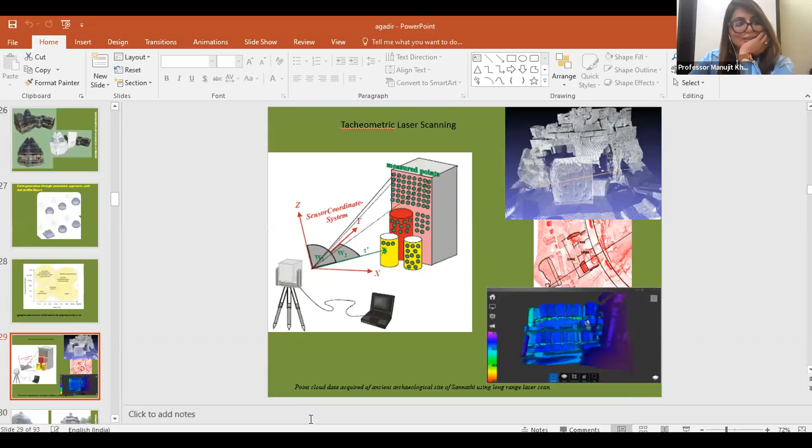Am I audible? My screen is visible? Yes, sir. Please, if there is any lag or something, do let me know. Sure, sir. So you're still on slide 2. On slide 2, oh my goodness, you should have told me. I'm about to reach 29. Now it is moving, sir. When I put it in the slideshow, it was not. Escape full screen, sir. Okay, now is it visible? Is it moving? You have to share the screen again, sir. Okay. Yeah, it is visible now, sir. I think all the while I was talking, none of you were really looking at it. So I might just go back quickly. Slide 3 has come? Yes, sir. Slide 3. Okay. I must have really sounded like without any.

Now can you see it? Now I changed the slides. Can you see it? Yes, sir, it's moving. So when I put it in the slideshow, it is not moving, I suppose. Yeah, this generally happens, sir. Okay. I'm sorry for it. Please do let me know. I'm on slide 4? Okay.

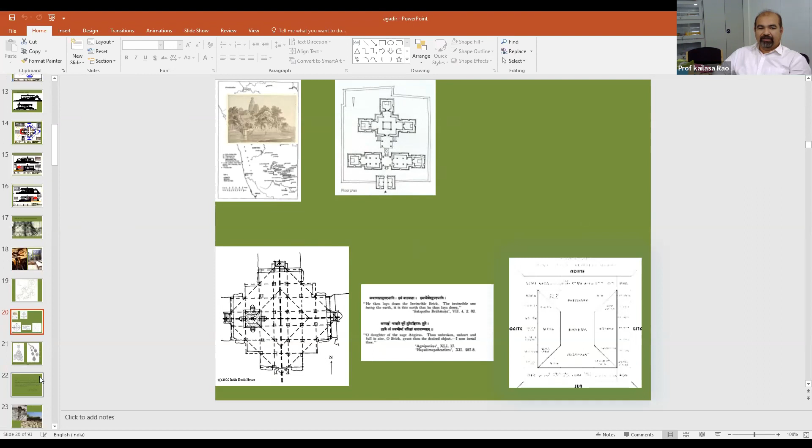But when it comes to publications, you can see either an oversimplified approach like this, or very age-old drawings, or very cryptic things like mandala types. But in reality, of course, I was also talking about Professor Adam's work in terms of the configuration of temple architecture, its deviations and its components; that much is done. But what happens is about this level of work.

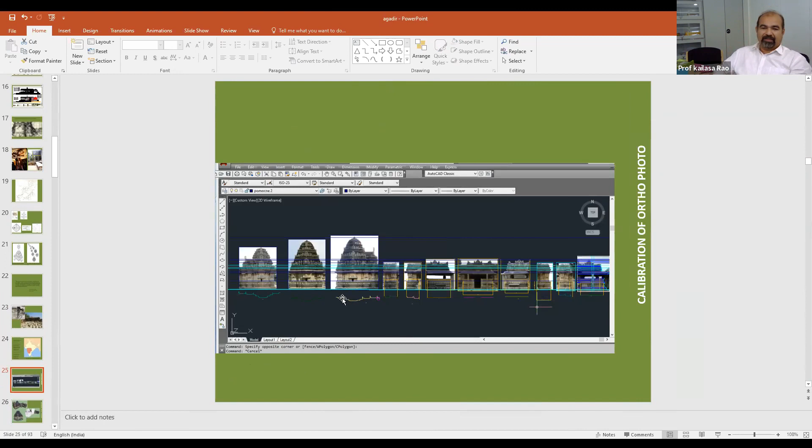Now, conceptualization itself is very important. For example, these are the initial techniques of documentation. We were trying to do it other than manually, maybe rectified photography, but it doesn't really work. If you really look at it, by just adding all four side elevations, you cannot make a building. This is a classic example. So there must have been a different approach altogether. This must be a generative logic. Now the slides are moving.

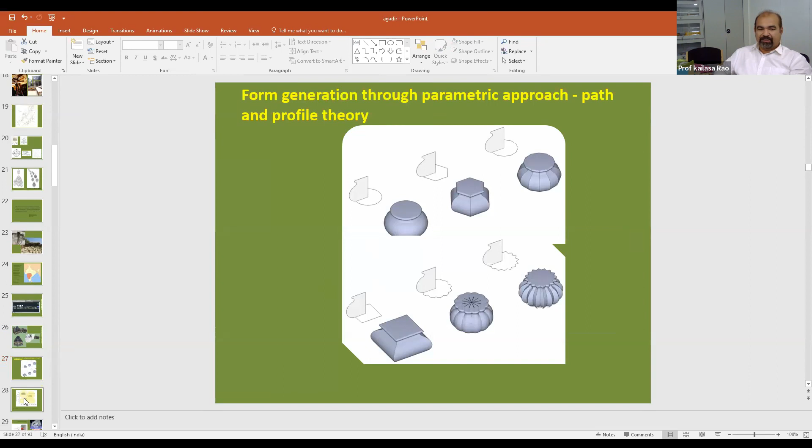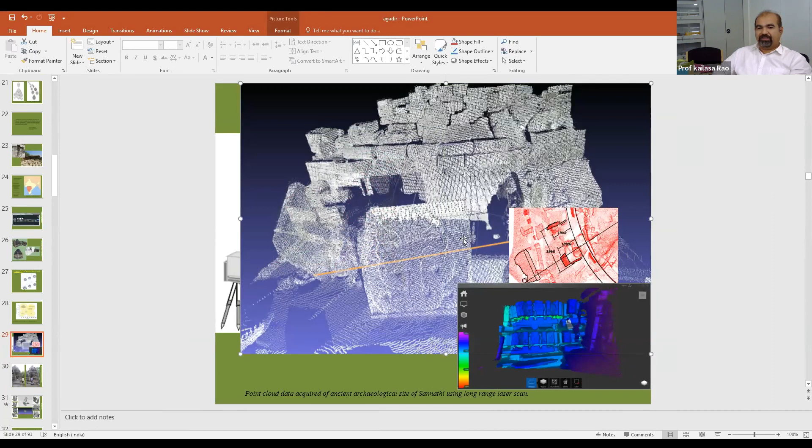Basically, it produces this kind of point cloud data. With this point cloud data, you can measure distances from point to point, and it's much more comprehensive. That was very expensive, so we started using something like an Xbox kind of thing. Of course, it works only in cloudy conditions or at night. Daytime is very difficult because it's very sensitive to heat.

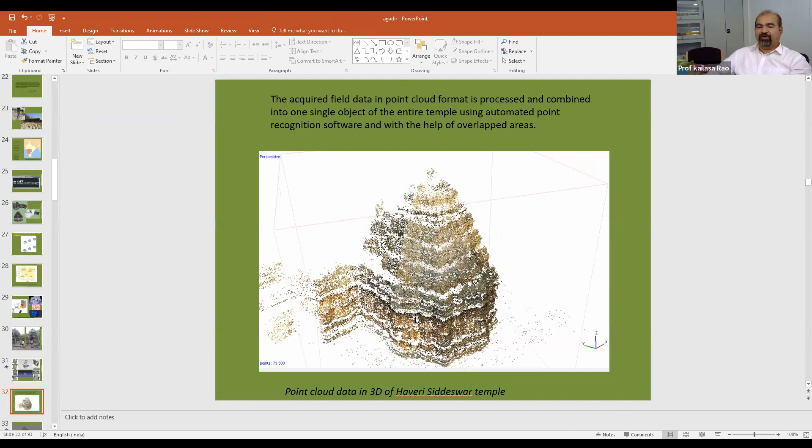With that, we could realize that you are not looking at a 2-dimensional approach, but getting the complete 3-dimensional idea of the whole thing. There was a limitation: we could only scan some 3 meters by 3 meters, so we used to assemble the whole thing into a larger one. The data acquired was points, collected, let's say, every 1 mm, and then you start processing the data using photogrammetric techniques, laser scanning or tacheometric techniques.

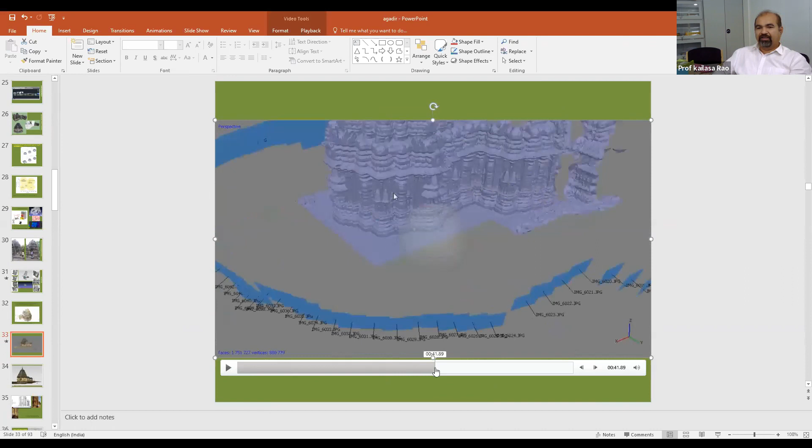So this is the point cloud data that we have. Then you process it into slightly denser data. You can see that almost 1 crore 12 lakh points of XYZ coordinates have been collected, and then you convert it into a mesh using different software, and then you overlay the imagery over it. So these are the kinds of techniques that we started using.

With this, we could get a more detailed understanding: you are not looking at a building just as a plan, elevation or section. You are acquiring the entire 3-dimensional information, because we realized that such buildings cannot be understood just using plans, elevations or sections. It has to be in totality. Got my point? Because the plan here is different, and the plan at a higher level is totally different, isn't it?

It cannot be understood like a plan, elevation or section. Plan, elevation and sections are modern tools of conveying your idea to the construction site, but can you conceive an idea through them? That is a question that we have. If you look at it, at every level the sections are different. At different levels, it is quite different from the other side of it. So all these kinds of things have to be really looked into.

So of course, we also have to be very critical about technology. Everything that can be done with technology always has to be cross-checked. Whatever I acquired always has to be cross-checked. And sometimes, to cross-check whether what you have seen on screen and what you are getting as an end product are the same or not, we used to even 3D print and check it. It is not only a make-believe thing. So that is the kind of details that we got into.

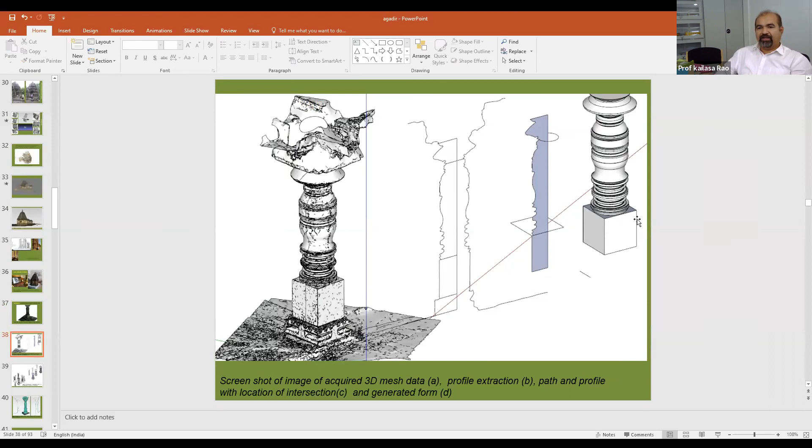Now, I was trying to understand how they were conceived. Perhaps one way of looking at it is through profile approaches. They don't do the entire drawing, elevation and everything. Just cut a profile, rotate it, and you get it. Or maybe you take different paths, like a circle or some other path. So this is what I acquired using scan data, and I deduced the data and tried to see whether it matches.

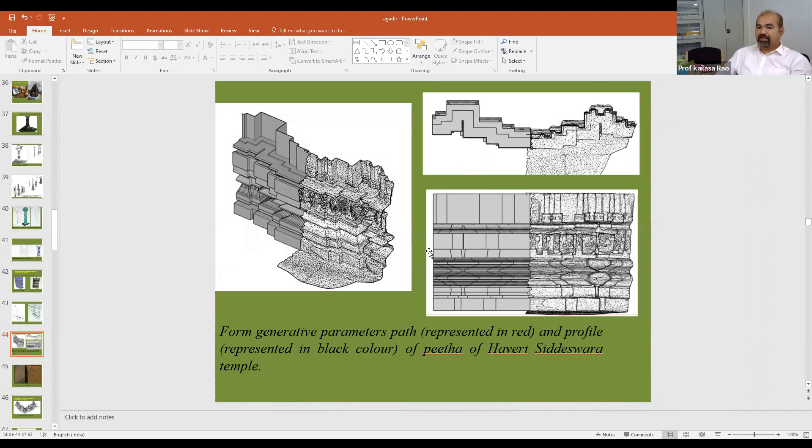It was perfectly matching, in the sense that for any complex detail like this, you keep changing the paths and profiles, and you can achieve very complicated details, whether at an element level or at a building level. For example, at just a component of the facade, every course is so varied. I could see that it is part of the profile, which in normal methods I couldn't have understood. But can I recreate it using simple algorithms? Yes, it is possible. And I saw the same approach in the floor drawings of many such temples.

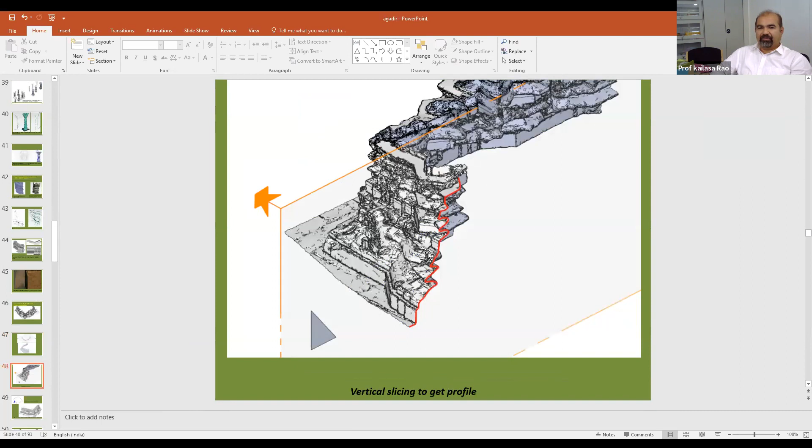To put this theory to testing, we took different components, like the plinth of a particular temple. Look at this particular temple, the Kashi Vishwanath temple, at a place called Lakkundi in Karnataka. The upper level plan is different, and at the lower level the courses are quite different, and they seamlessly join. This is the scan data. I took that scan data and started cutting different profiles, and finally I could reduce the whole data into these two profiles.

And when I revolved this in the software, exactly the same thing happened. I have not changed anything. It's not like I do the lower base first, then this base, and every course. It's just a generative approach. It worked very well. And to see whether what they have done and what I have done match, I matched both the meshes.

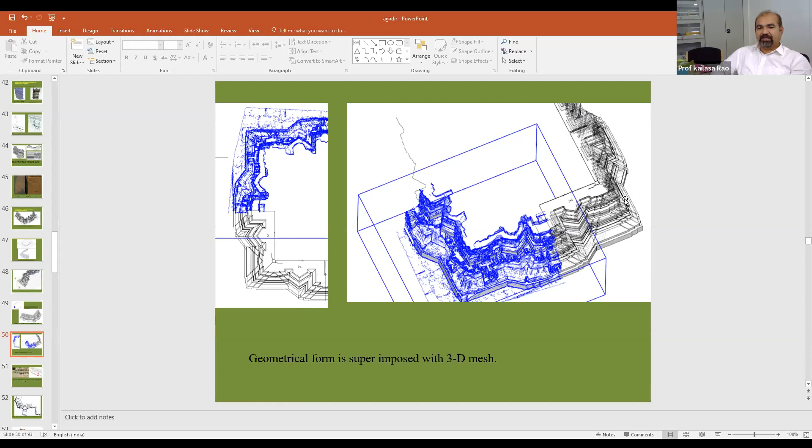What you see in blue is the scan-acquired data of work done in the 11th century, and what you see in the lower level is data generated using a computer. Every line matches, including the small grooves. The little corner tips all fit so well. That means these guys had a method of computing. To test the theory at a larger scale, I took the overall building of a temple at Haveri, reduced the data into smaller parts, and started working in basic software. It perfectly looks like they used a certain kind of computing.

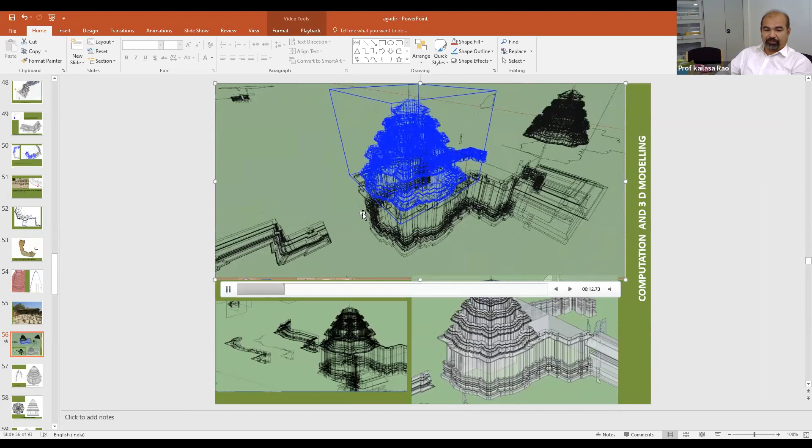Now, do not confuse computing with computers. Computing is an approach. You don't draw, you generate it. It is not that you draw a plan and work out an elevation. It's not drawing based, it is a generative approach. So theoretically, it seems to be matching in my computer, but I have to test whether the theory holds or not. So how do I do it?

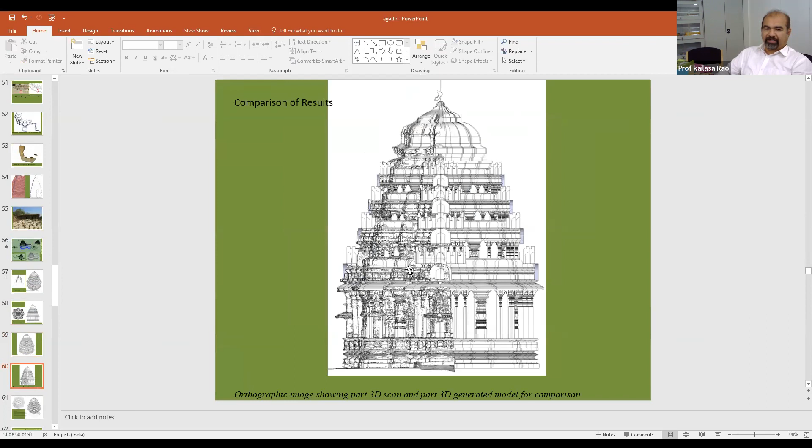I scan a building and generate a building using a certain method, a profile approach, and then match both the meshes. You can see that, of course, a little erosion and distortions are there because of the vagaries of nature, but otherwise every line really matches. So I tested the theory for even star-shaped temples also, a temple called Doddabasappa temple.

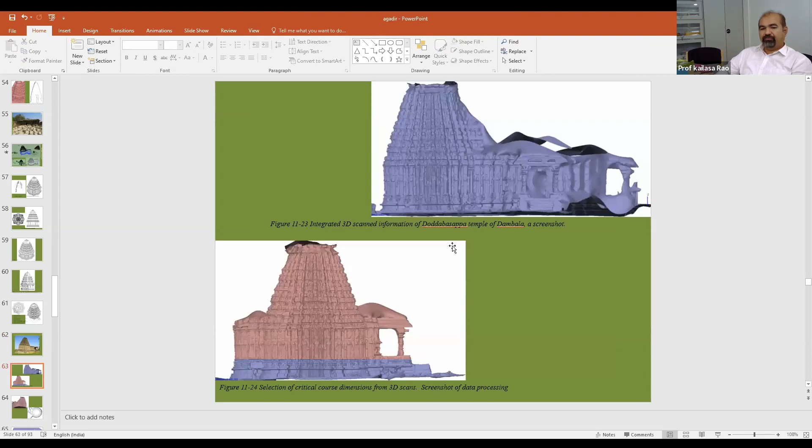So using whatever tachometric techniques available, we tried it out, and different layers of every course have been more checked under the scan data. This is the scan data sliced at a generative level, and then we understood the various logical configurations of it, how much of the reduction factors and how it can be done.

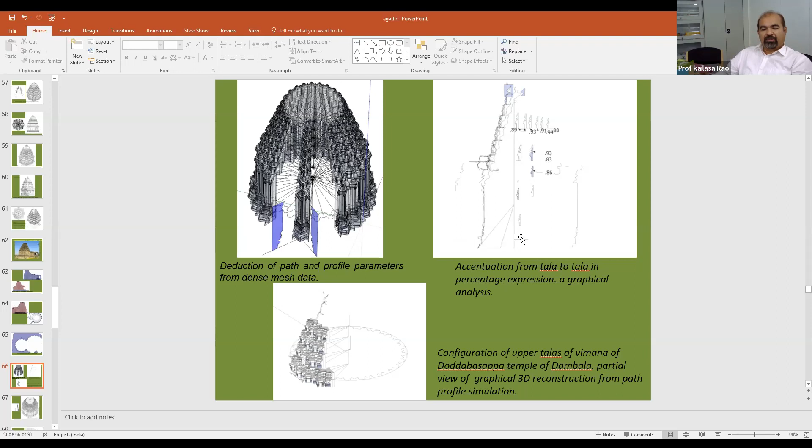So we tried it out, and it really, interestingly worked. I could generate the whole structure without actually drawing it, with pinpoint accuracy of every line. That means our traditional knowledge systems had lots of these kinds of approaches where you can create, conceive, and translate such complex geometries without the current day kind of drawings. If you really had to make working drawings for it, it may cross 5,000 or 6,000 drawings. But how could these Sthapatis do it so effortlessly? So for each of these things, there seems to have been a strategy for conveying these ideas.

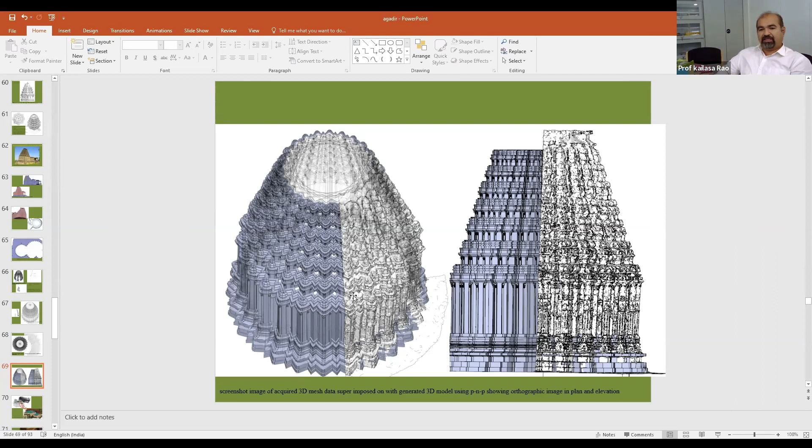So that's the thing, and it can be broken into every course level of detail. One course, when it's done, automatically generates the second level course, the particular next seam line. So I have tried this out with various other things with Professor Adam Hardy, around 8-9 years back.

Some of the things, like drone-based approaches, we could also do it, because at ground level it was very difficult to assess the roof plans of these temples, impossible to actually draw a roof plan. But with this kind of approach, using point cloud data that I showed you, and how we processed it, we could generate it. Now it's giving a lot of new ideas, that they have actually a generative logic for it. So we could really reconstruct a variety of these kinds of structures using these technologies.

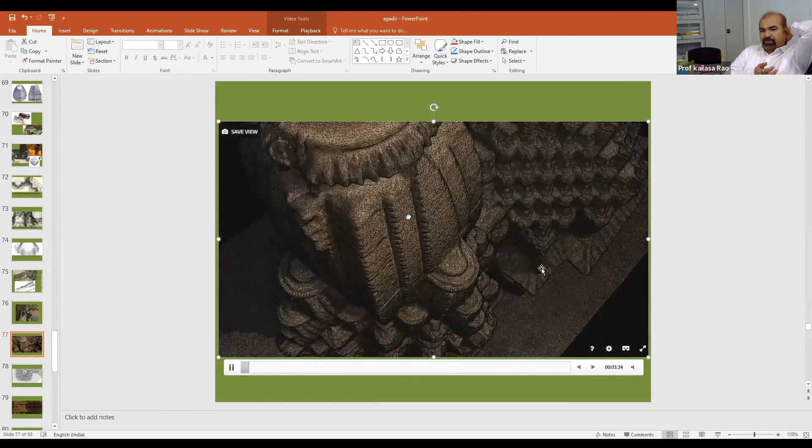Another temple, Jasmalnath temple in Asoda, Gujarat, one of the Solanki period temples of the 10th-11th century. Perhaps a lot has been learned by the Khajuraho group of temples from these kinds of temples, multi-Shekari temples, which are called Anekandaka kind of temples. So we could really understand the various facets of it.

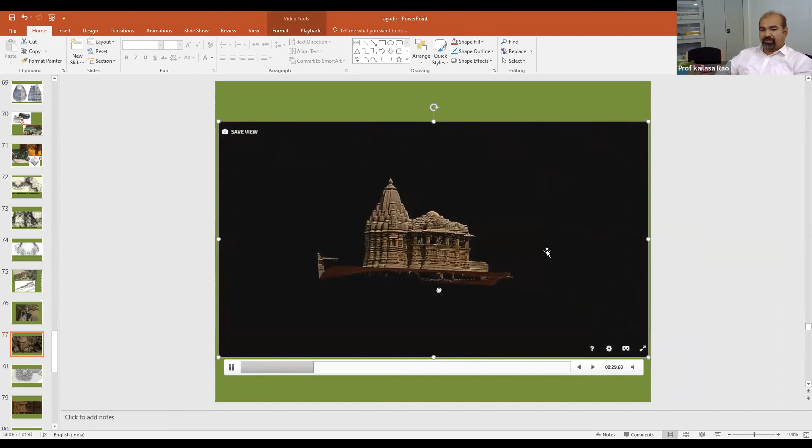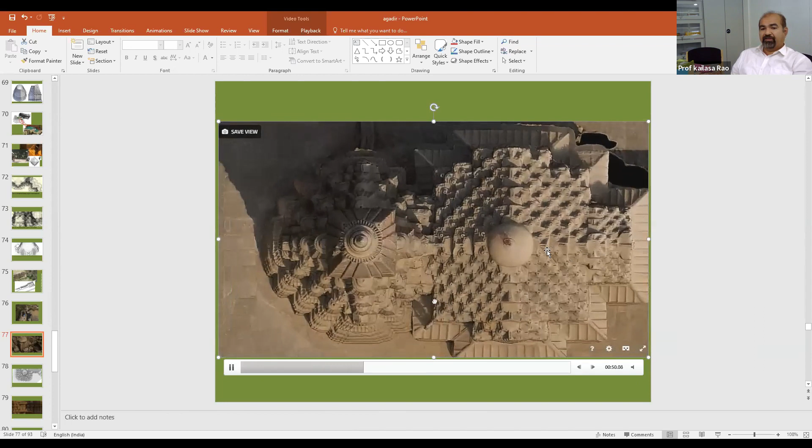Now, once I do it, I put it into orthographic mode, not perspective mode. Lots of original ideas, what they might have done, started appearing to us, the most important aspect being actually conceiving a building from top to bottom. This is my opinion, that they always conceived from top to bottom. So this is the kind of roof plan which otherwise would have been impossible for us to generate.

They look similar, but there are a lot of variations. They have tried it out from one configuration to another configuration. A lot of this kind of proliferation of forms has been done.

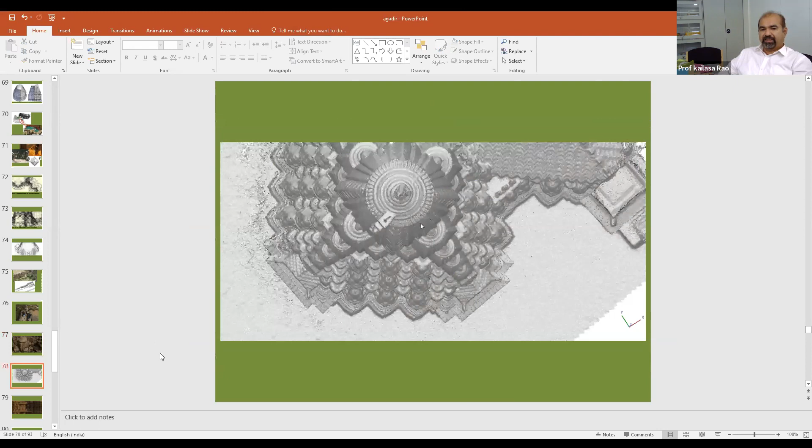So what I'm trying to convey is that these kinds of ideas, which they generated thousands of years back, at least 1,000 years back—most of them are 9th, 10th century—we'll look at another temple called Taranga Temple in Gujarat.

Which we could use with this kind of data that we may acquire. It was completely a revelation, the level of complexity that they have done it, just using a simple logic and taking it forward in a very complicated way. So this is the kind of scan data I'm showing you. The moment you take it into a computational understanding level, things can be very, very interesting, and new understanding is emerging about how they developed such complex models using this approach.

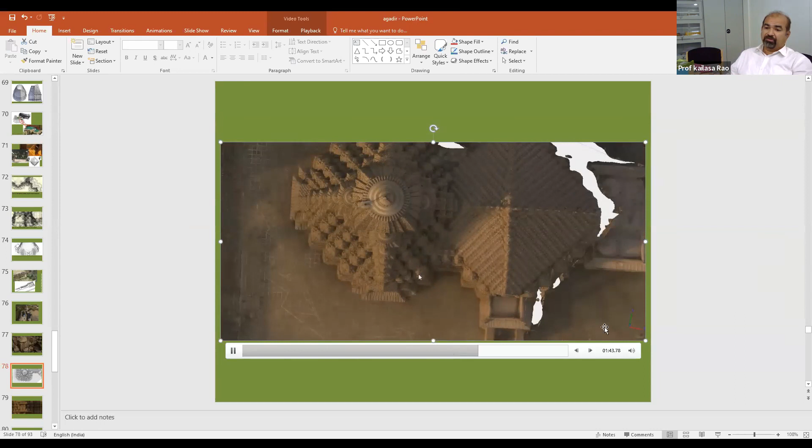So after doing this, I also started using it extensively in different areas. One of them is the ghats of Varanasi. I did around 5.5 kilometers of the running length of the Varanasi ghats.

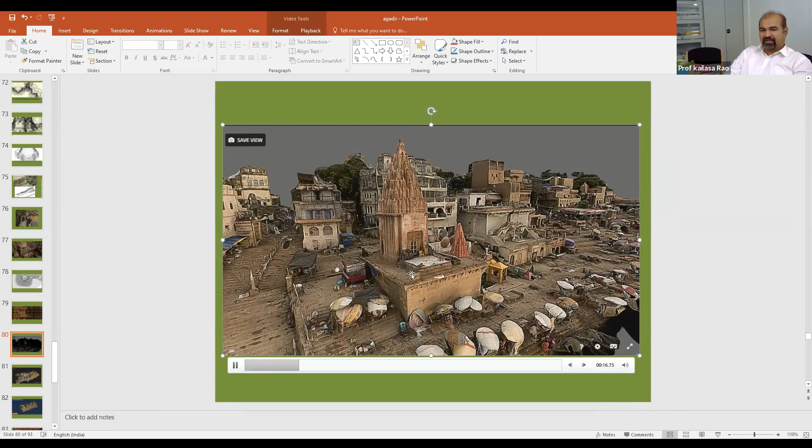That is for a different purpose, not exactly to understand logic of construction, but more for assessing the complex nature of these ghats, identifying different layers, so that it can be restored and managed, given the complexity of thousands and lakhs of people gathering there.

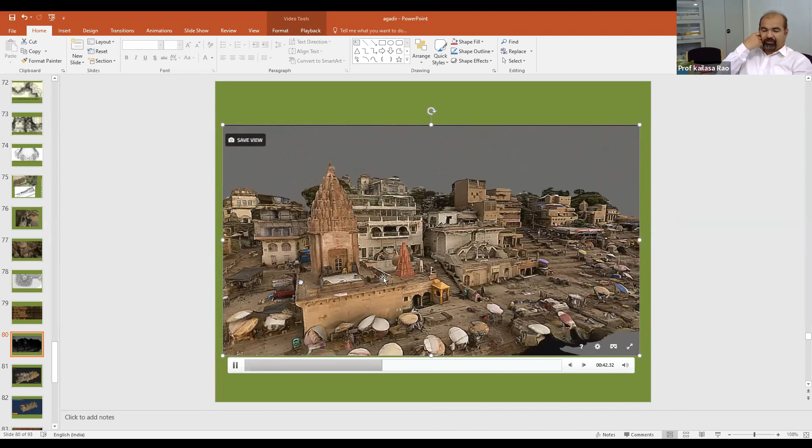So to assess it, you need a very detailed level of studies. Once you have a detailed understanding, only then can your interventions be good.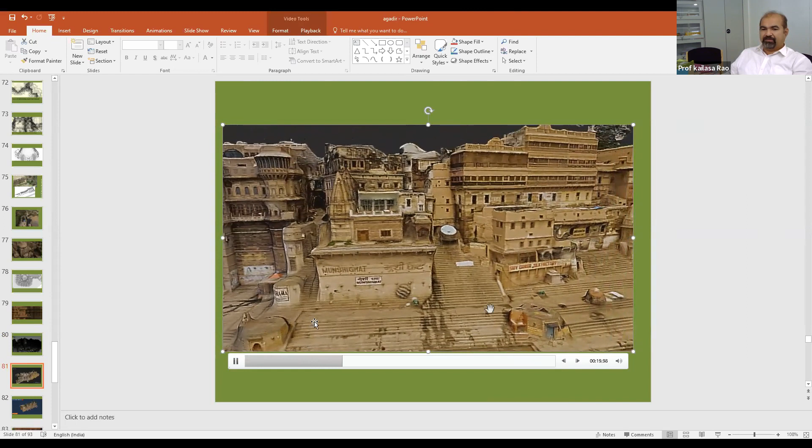Now we started a program at SPA Bhopal introducing various new techniques and strategies to understand heritage with a techno-based approach. One part of it is understanding the computational logic, and the other is using these tools as strong diagnostic tools for detailed assessment of buildings, monuments, large areas, urban fabrics, and other things. These are the areas I've been working on.

And of course, these are all integrated with new georeferencing, whether matching at every level or even in terms of assessment of every little point of it. So quantification and various things we can do very realistically.

Lastly, I can show what is really happening with these kinds of complex structures on ground. Imagine this 11th century work, and overall this is the kind of restoration somebody has done.

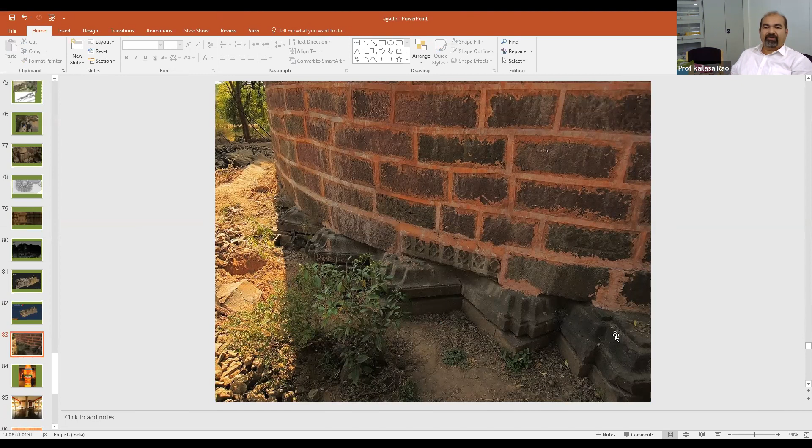No respect for the original understanding of it. We somewhere lost this whole idea, thickly painting, hiding all the details, destroying this one. There's a lot of renovation that happens unsympathetically without caring about the original idea, such complex wonderful ideas, and just using some bathroom tiles or granite cladding, or insensitive additions without even knowing the original geometry.

This is very unfortunate. I can only say these are insensitive ideas, a lack of understanding, because they never understood. We have not understood our own genre of temples, the various complexities involved, and eventually make such a mockery of it.

So in a nutshell, what I was trying to give you is an understanding of Indian traditional architecture, just one small example of Indian temples, and try to explain the various complex geometries it has, and how to really look into it using a computational understanding.

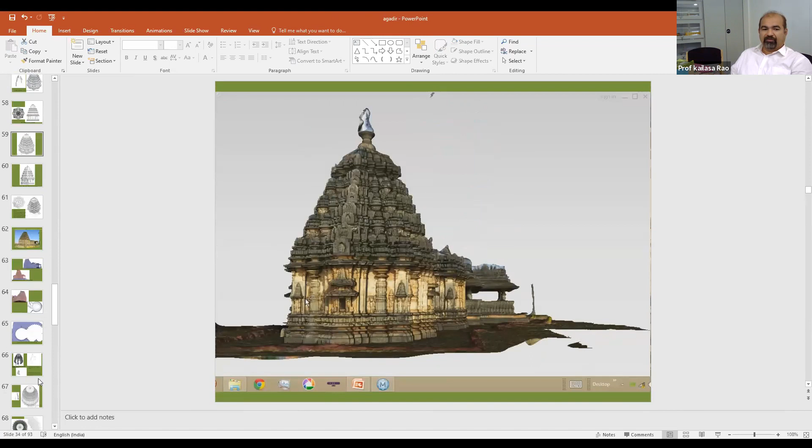And all this data is not just for understanding purposes, but once you have this data, you can do a lot more detailed assessment of its condition, very accurately. Once you have strong orthomosaic information, you can create quite interesting levels of data which we can take forward for various other applications.

Hope I could make some introduction to various approaches of looking at these traditional buildings with a few examples that I could take.

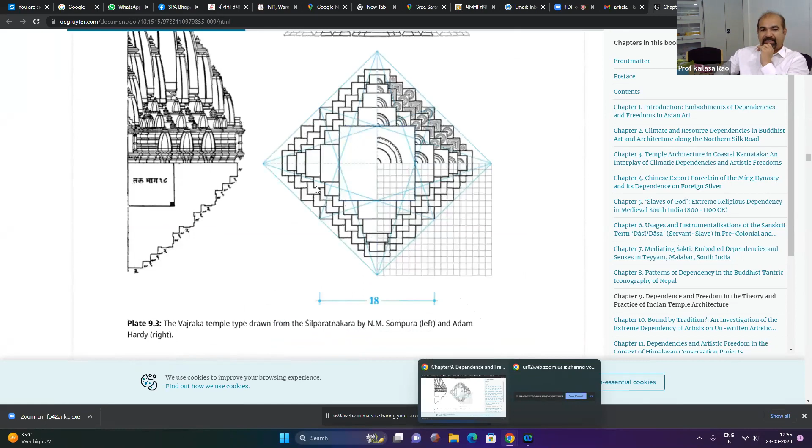Now this is what I have given him in terms of elevation. Exactly based on this, he can really, now this is text based. Let me just show that one.

Yeah, these are the text-based ones, and to cross check whether the text was really followed and how much, this was my photogrammetric analysis area - what really happened in reality on ground. Can you see this now?

Yes. So now how much subdivision happens in plan, how much happens in the vertical, what really happened. Many times we see this - for one Bhumija temple, this is before I evaluated this temple.

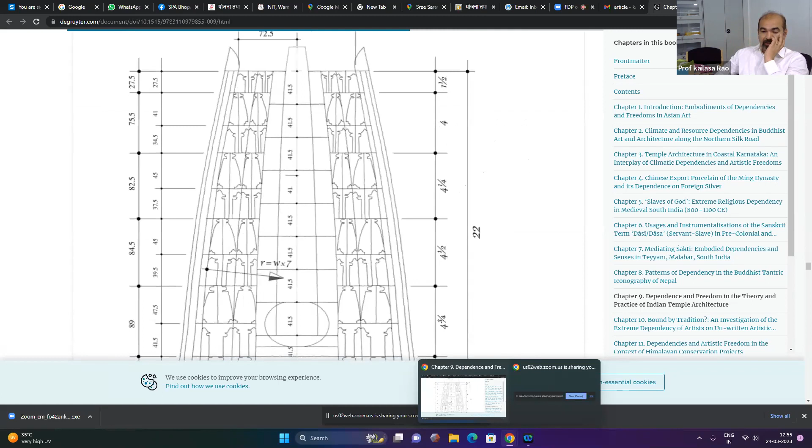This is what Professor Adam Hardy has seen, and he has done the entire Bhumija configurations text based. But in reality, when they tried to measure it, it was not matching, or a lot of anomalies were there. So these are the text based ones. And after this, if you can see this, this is the scan that I did. In fact, sir has been very kind to give my acknowledgement in the paper that these are the photogrammetric models developed by Kailasa Rao.

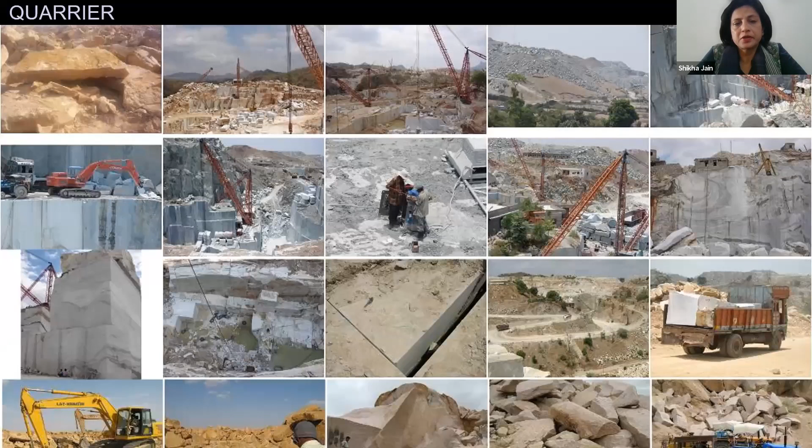We went into several quarries. I'm going to actually switch off my

So as part of the project, we interviewed quarriers, processors and suppliers, as well as craftspeople, architects and conservationists. There were about 150 craftspeople that we could interview. And we mapped these clusters across the entire Rajasthan, in total 9 clusters. The types of stones vary, and the craftspeople have their expertise in different kinds of stones. All this data was documented and recorded.

You can see here the process that was recorded and the products. So clearly this craftsmanship is something very unique to India and Rajasthan that needs to be propagated more. But if we look at our current architectural education, most of the time the students are not informed about the details or the process involved in this.

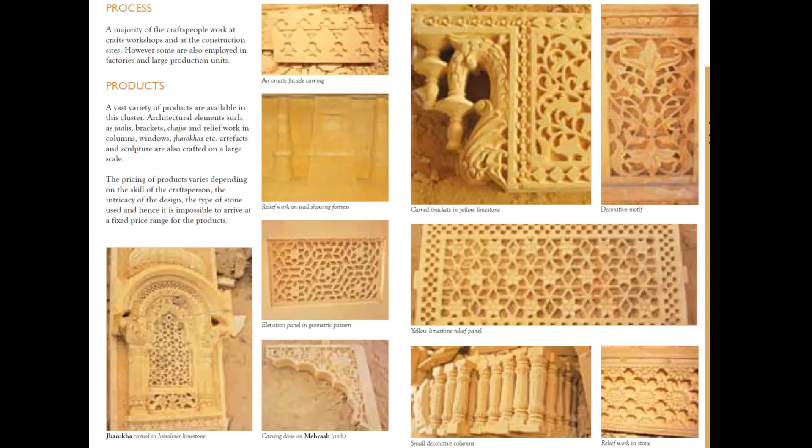For this project, we had about 5 groups where we involved architectural students and interns who went to the field and interviewed these craftspeople. Our question was, how can we learn about stone crafts and knowledge systems? One is understanding details from the historic architecture in stone, and second is learning from the master craftsperson.

From the archival resources, we could understand that the stone used in historic architecture is even mentioned in our traditional texts. They describe the bonding done with different kinds of stone, and name the male, female, and neutral stone. And of course, examples of stone use are there in historic architecture since ages, right from rock art to temples, as you just heard from Professor Kailasa Rao, and later on in forts and even houses.

And this is very well recorded in traditional texts, including paintings like you see here from the Baburnama, where he's supervising construction of a garden, or the construction of Agra Fort in the Akbarnama.

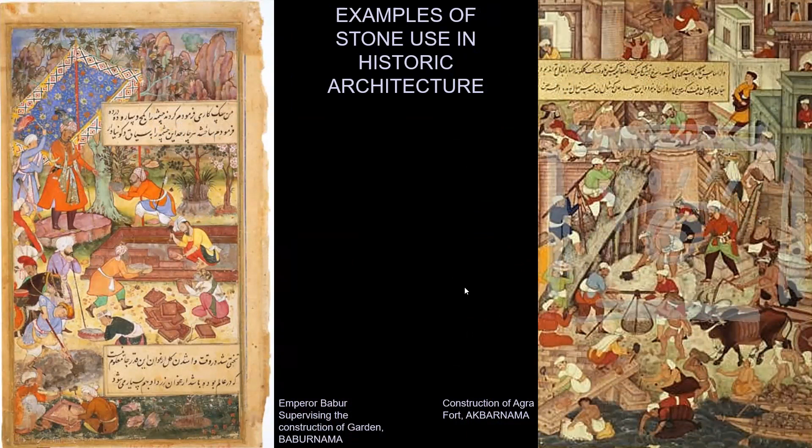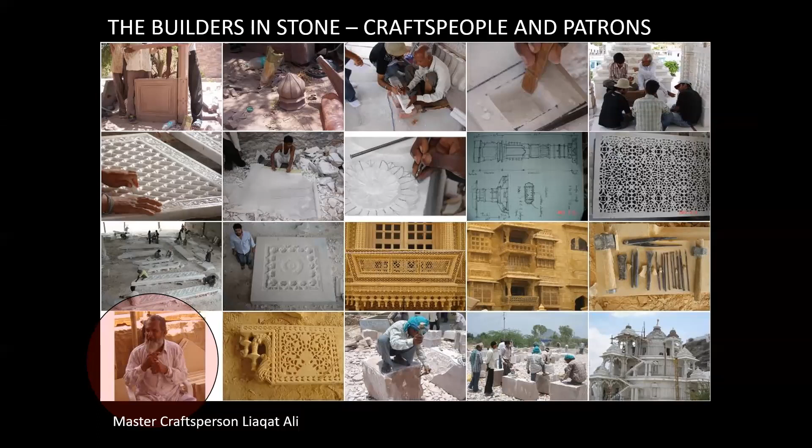Who are the stone craftspersons today? The temple builder, sculptor, stone carver, inlayer, stone mason, stone polisher, quarry workers. So you see the Sutradhar, Stapati, it could be the Sompura community, which is residing in Gujarat currently, but they are the ones making temples even today, largely in northern and western India. And then you have the Stapati community that is working in southern India, in the Tamil Nadu area and Karnataka.

You have the sculptor or shilpkar. So these are specialized expertise. Most shilpkars specialize in the making of the idol of a particular deity, deriving designs from years of training and intuition. They often select the stone for the idols at the quarry. They calculate the proportions required for the deity and undertake its carving and finishing.

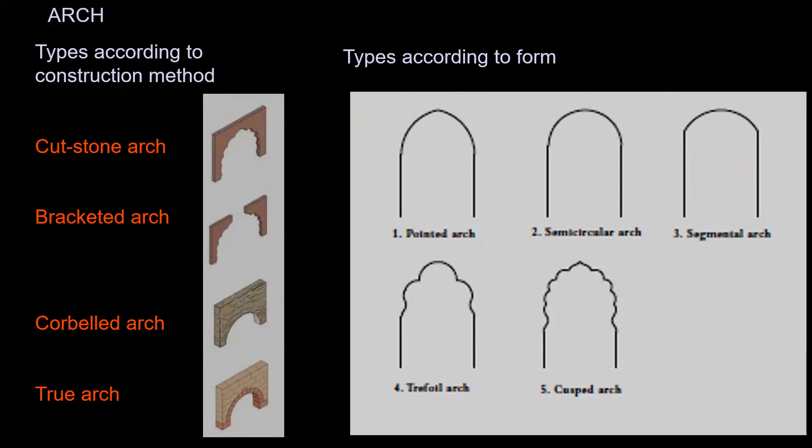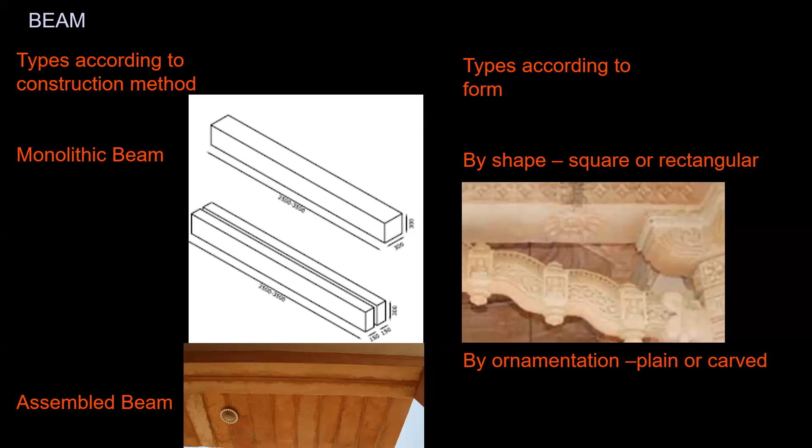Similarly, beams, how many kinds of beams are there? The monolithic, assembled, square or rectangular, plain or carved. What are the fixing techniques for these beams? Brackets, which are one of the most diverse in terms of design and variation. We find them in various historic structures.

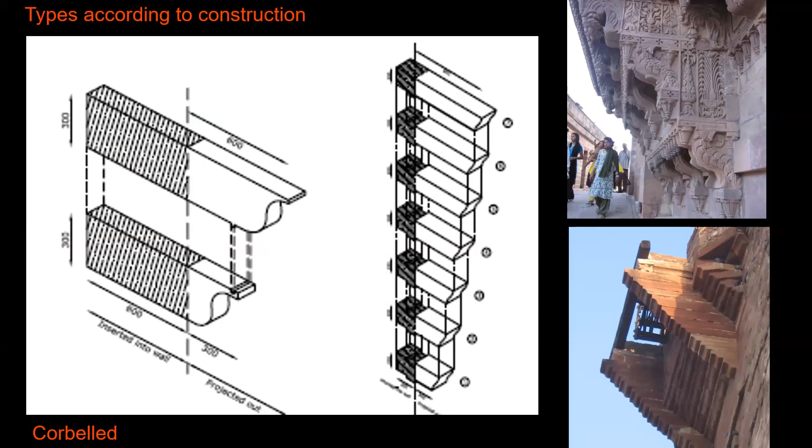And this was created as a model by the late Mr. Nimish Patel, who was also advising us on this documentation. So various types according to construction, you can see the variation in brackets. It could be single or several layers, extensively carved.

The fixing details. So you can see how much the bracket goes inside if it's supporting a chhajja, or how much it goes inside if it's supporting a complete balcony. The usual rule is that the plain bracket should go in as much as the carved one you see outside, as a principle of cantilever. So these are some variations. So again, from the traditional carving to the current ones, what kind of designs are available in brackets?

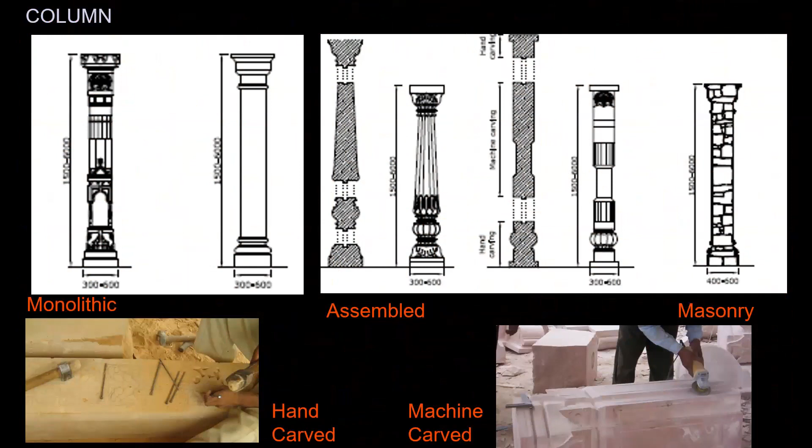Similarly, columns: monolithic, assembled, hand carved, machine carved, and how this fits in, the base, the capital, the jointing, the carving details, and how these are used in various ways. The roof form, which is very complex because you have both the flat and the domed one.

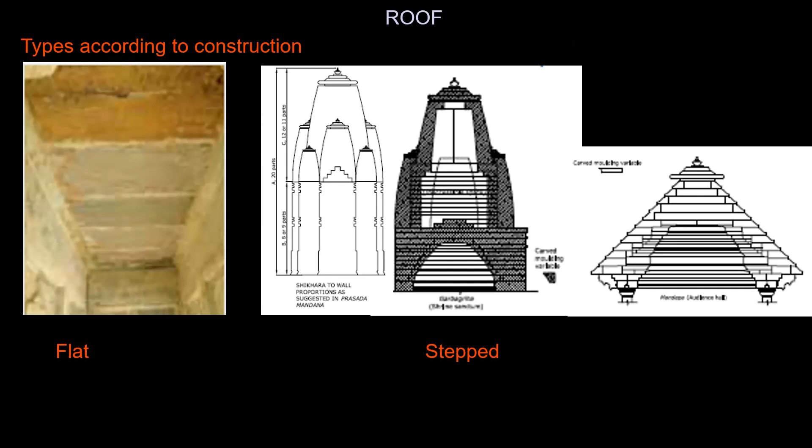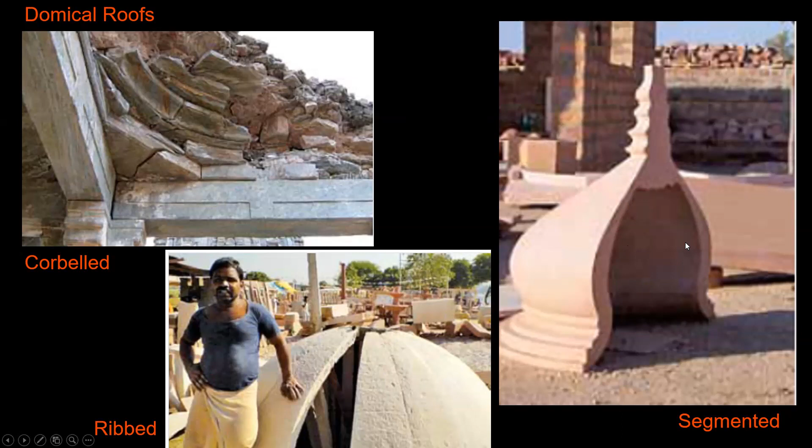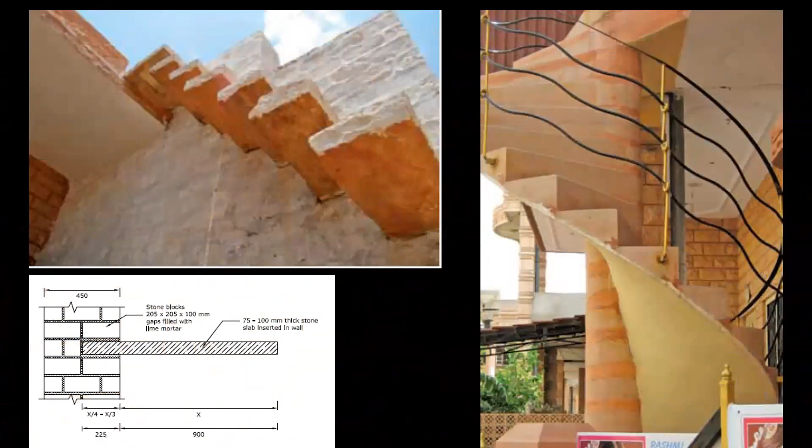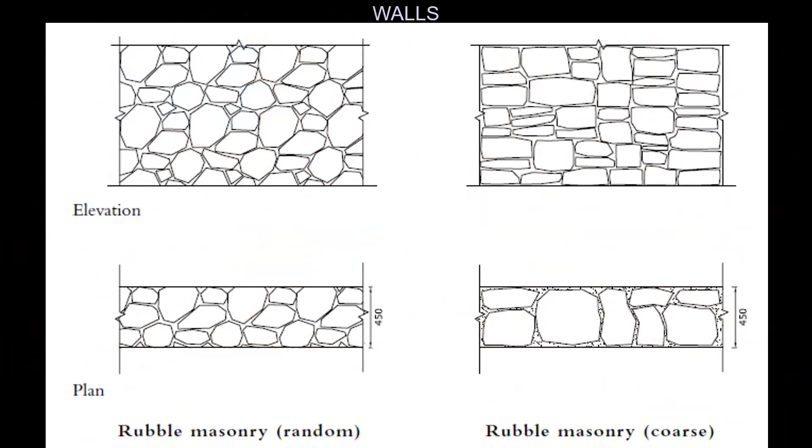So the walls, of course, again, the rubble masonry coarse, there are various forms, how they do infill, and how this kind of construction continues to happen even today, especially in places like Jodhpur, Jaipur, in fact, all across Rajasthan, because the craftsmanship is still available there.

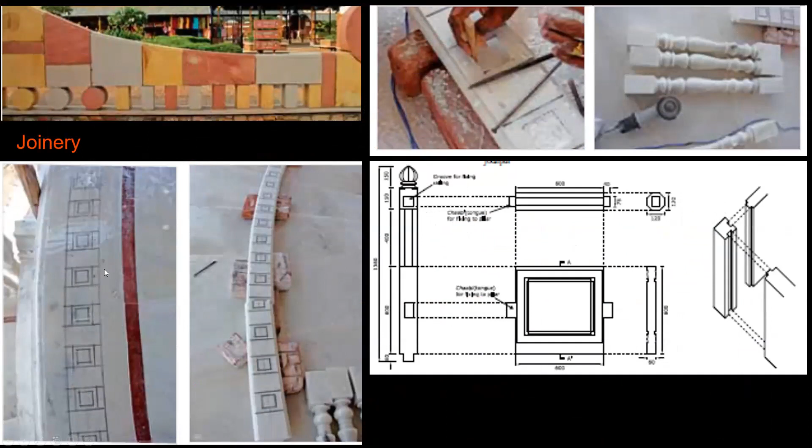So again, we have a craftsperson who's marking it, who's making holes, and how the railing is fitting in the details. So this drawing shows how the stone railing and the top rails would fit into the pillar. And you can see the beauty of the stone railing. So on the left, of course, you have the traditional ones. On the right side, you see this from the Gandhi Museum, which is in Delhi. You can see the innovation in stone railing below, which is very contemporary, but still an interesting use of stone craftsmanship.

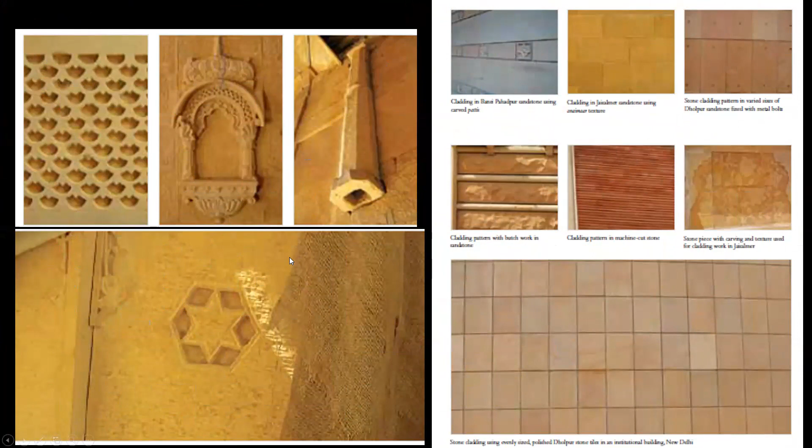But of course, the traditional finishes, you just have different kinds of hand finishes, which have been recorded and documented as part of the indigenous knowledge. And the current finishes, of course, the kind of finishes that you get through the processors and suppliers today. But the whole idea of this was to promote the craftsmanship and to link this knowledge with the contemporary practice.

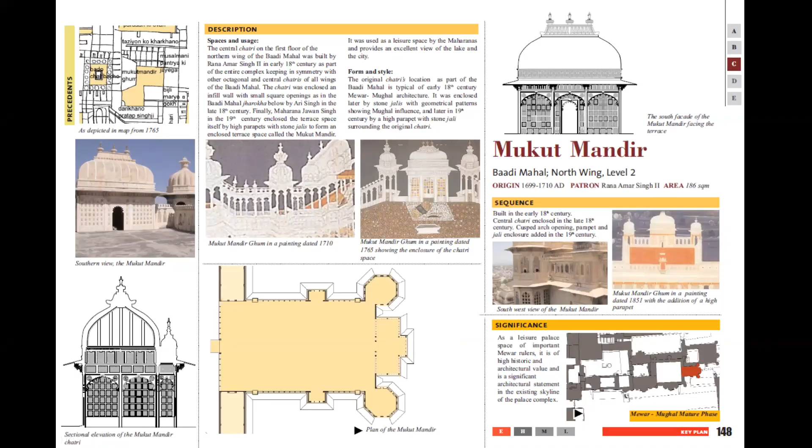And this is more detail of this. So you can see the square grid jali, which was the basic jali, which is what I said was the origin. You can see how this square grid was filled with later infill. So here you find more complex structures. And on the right side, on the railing, you see the octagonal kind of jali grid, which was an influence of the Mughals. And below, you can see the British period changes.

So if we are looking at creating a jali, it can be made by establishing a grid, which is square, rectangular, pentagonal, hexagonal, or octagonal, or just a basic module. And the most common and versatile is the hexagonal, which is called chemas. And what you do is mark the center, divide both sides, and mark the grid, and then draw arcs using the grid, as you can see in the figure, and then follow this pattern.

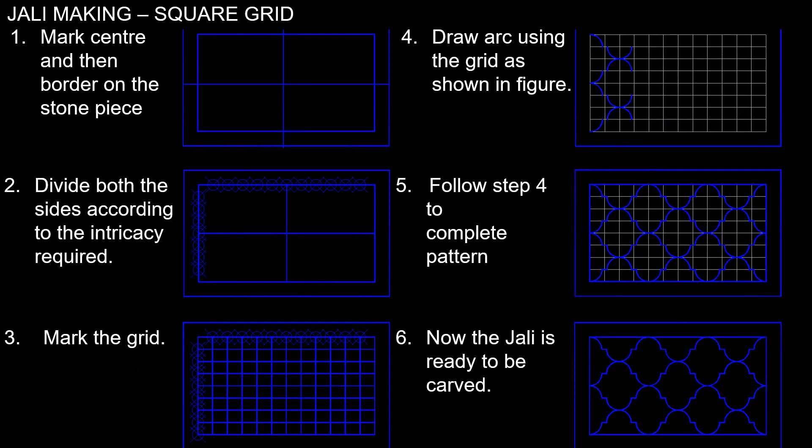So this was actually after a video recording of a master craftsperson in Makrana that we could actually understand how the jali is created. Today, even the craftspeople who are working on it just use a stencil. They don't have the knowledge of a master craftsperson. They would take a pattern, use a stencil and get the jali. And the same thing is happening even with CNC or getting the pattern printed or used. This is what the craftsperson showed us.

You can see him marking with a green leaf and then creating the entire jali in the various steps that I just showed you, using a divider and then creating the pattern and cutting out these pieces. The difference between this master craftsperson and using a stencil is that using the same grid, the master craftsperson can design various jali forms. So he can generate hundreds of jali forms. But if we are using the stencil, we can just create what is there. It's a very frozen and fixed kind of design.

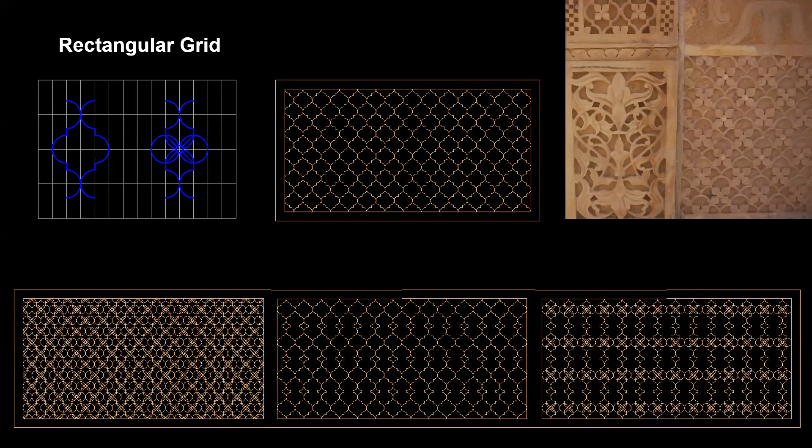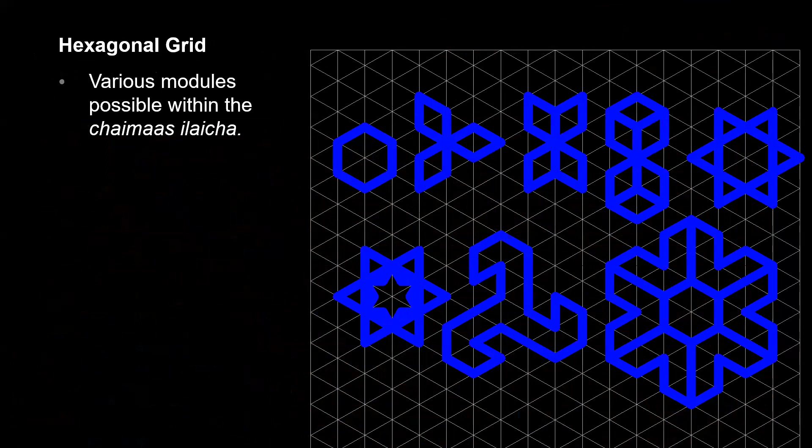And you can see the variations that are possible in a rectangular, in a hexagonal, or the chaimaas grid, the 30-60 ilaicha that they call. And this, of course, is a complex one, and then the square grid. So in the hexagonal grid, you can see this allows the maximum number of modules. You can see the various modules that can be picked and the kind of jali that can be created. So you can see these various forms which have been translated into AutoCAD by the students who were working on it.

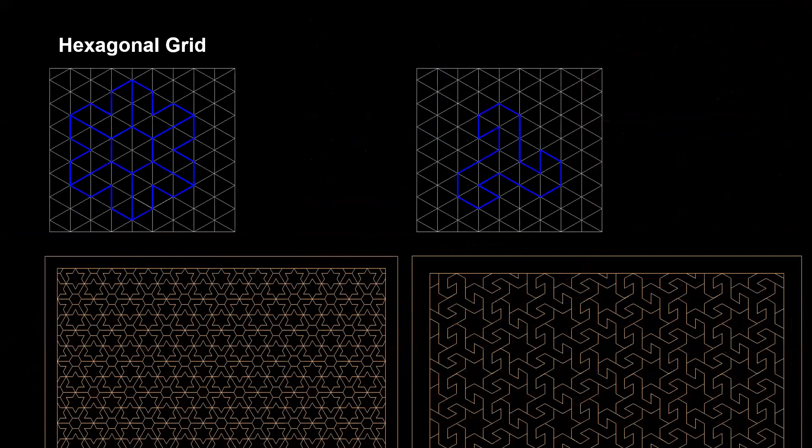And one of the things that we found when we were interviewing the craftspeople, especially for the jali, there was one master craftsperson in Jaisalmer who told us that today he gets architects who just come with an AutoCAD drawing, which is offset on a computer, and they've created a jali, and they ask him to make that jali. And he said they don't understand how stone is carved, and they don't have the understanding of how the jali is created. It's just some form in 2 dimensions on AutoCAD. So to avoid that kind of thing, we really need to understand how the creativity in jali can be retained, rather than just fixed forms.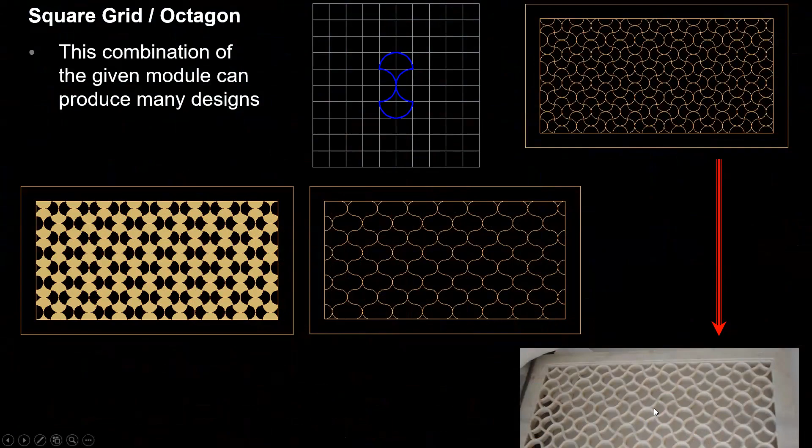And this is one of the most complex stone jalis that has ever been created, I think. And you can see it's a square and octagonal module, but with the kind of refinement, you cannot even make out what grid is used here. And you can imagine the craftsmanship intricacy in actually carving this. Sometimes it takes them 3 to 4 months to carve a single jali like this. We also recorded the tools and methodologies for carving these jalis.

Now I will tell you how the application of this is visible. In case of City Palace Udaipur, we found broken jalis. In some cases, we could find the patterns clearly and get the jali recreated because the pattern was visible. But in this case, the pattern is hardly visible, and when we asked someone to make this jali, the person who created it, marked below as cross, could not get the actual design.

Then we tried, with one of our trainees, to create the jali on AutoCAD using the methodology the craftsperson had told us, marking the center, the division, and trying. That's what you see on the right side top. We could actually come up with the right design you see on the right bottom, and this is what was finally created on site.

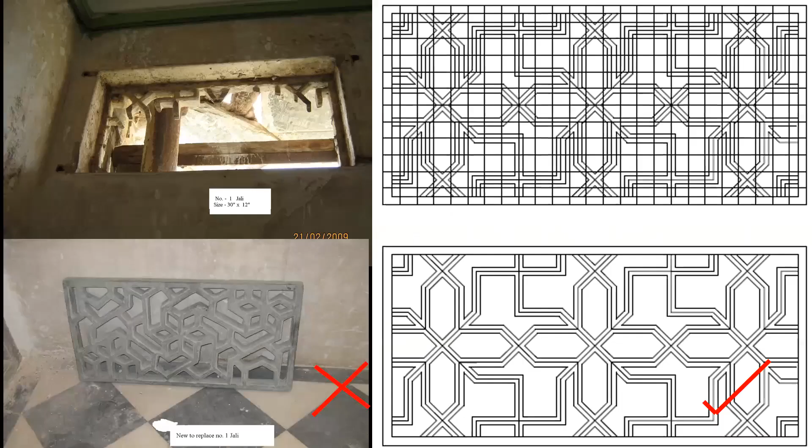Moving on from the stone crafts, I'm talking about traditional texts that have to be interpreted, like the Vastu texts. I'm sure in earlier presentations you would have heard enough about Vastu, but there are numerous texts talking about Vastu or new construction. There are very few that talk about the Jeernodhar, and that is actually in the Agama texts that we have.

So when we are doing conservation of temples, it's not really the Vastu text that we refer to, but the Agama text. You can see the list of these texts we were referring to while doing research on temple architecture, specifically in Tamil Nadu, because there was a concern about the conservation works and how they were being carried out. We had a UNESCO mission to look at the Tamil Nadu temples and their conservation process.

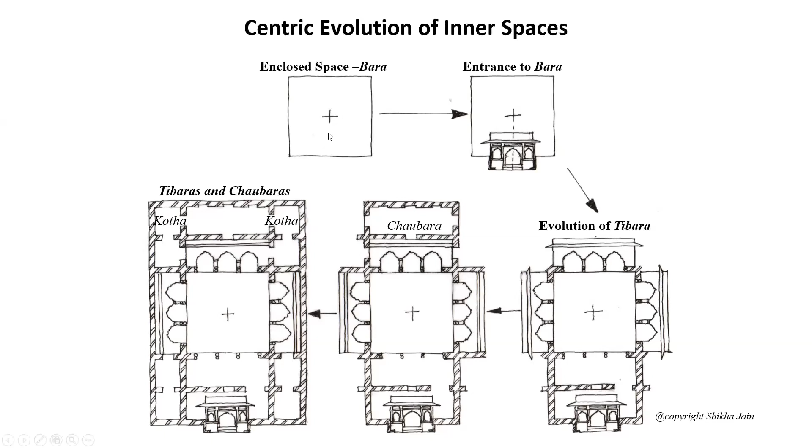But we have to understand that as per the indigenous perspective, we design from the center outwards, not the other way around. You can see it even in the ground plan, in the rituals that were followed, the Vedi that is there in traditional texts, or even while recording these historic forms.

Like this is a plan of a Haveli. You can see the court center, how it determined the elevations of the inner court, which were always more elaborate than the outer facade.

On interviewing these people on how this Haveli or house form was constructed, we found that everything was marked from the center outward first. So whether it is the plot of the Haveli, the boundary of a plot, the first thing is to mark the center and then evolve your design.

The same is there for the proportions of an arch or even for the jali. I just showed you marking the center and the border when I was explaining. Or why we used odd numbers in steps, or even in the stone pattis of a roof, because of the centric numbering that we had.

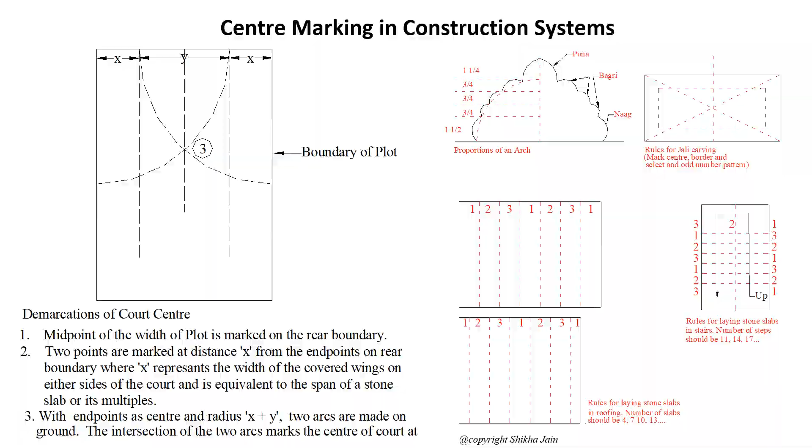Using this, what I found was you can actually read just by standing in front of a Haveli or a traditional house form, and determine whether it is a single courtyard, double courtyard, or more, without going inside, because of the way it is created.

So this centric evolution, I'm just showing how it went from double to triple to multi-courtyard Haveli, whether it was a single family cluster or fraternal clusters, where you had Marwari families with various brothers doing business together and living in the same area. But you can see how, from one center, the entire form evolves.

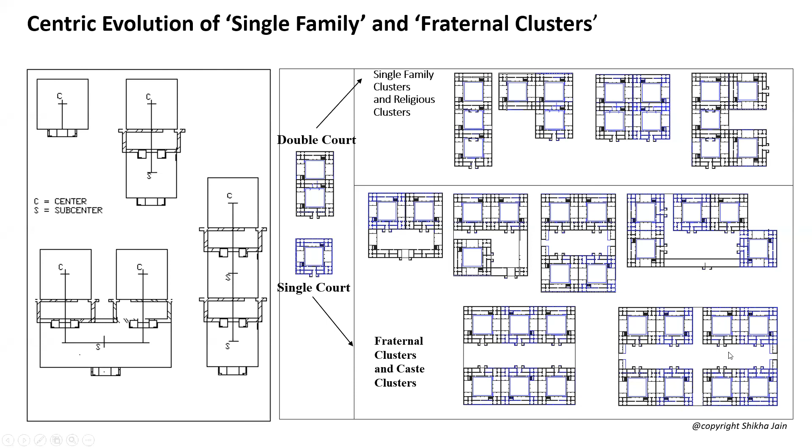This center sort of gets reflected even in our ritualistic center, whether it's a temple or a well; the political center, whether it would be a noble's house or Haveli; or in the urban planning form, it would be the ruler's abode, and of course the number of dwelling units around.

This is the first section I wanted to show you. I'm just going to say that we are using a Western approach currently followed in all architecture colleges, where courtyard space is carved out in the built area. But if we really look and use the Indian knowledge systems approach, it's actually the courtyard that is the primary space, and the design evolves around it.

So my question for the audience is, how can you incorporate this IKS of designing in current architectural education?

I don't know how. Do I just have another 10 minutes to finish the lecture, or should we break and take questions now? We do have time, ma'am. We have time, we can take the questions now. Okay.

So would anybody like to respond on this? Because my concern, after this indigenous knowledge system, realizing how the Indian perspective is, whether it's the craftsperson or our house form, or even in today's practice, we see that the way we think, we have a lot of centers and multi-centers in our cities. But when we are designing in architecture colleges, students are never taught this methodology. So that's my question for the faculty involved in design in architectural colleges: do you feel there are ways one can incorporate this?

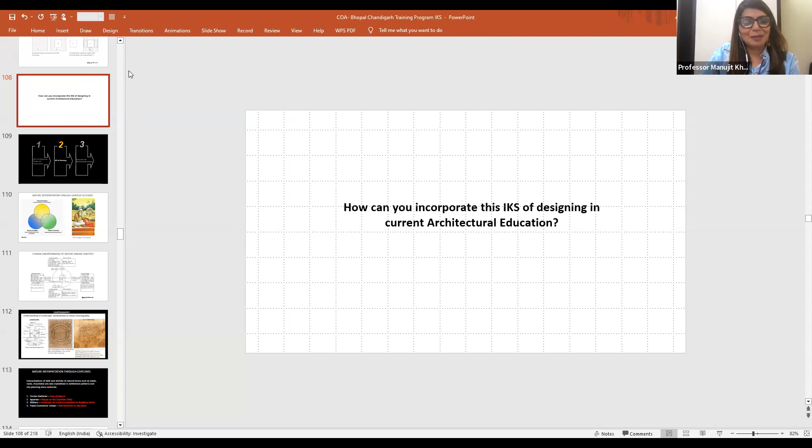Excuse me ma'am. Dr. Shikha, ma'am. Oh sorry, I was speaking while on mute. Till what point did you lose me? From the beginning, ma'am. After the question answer, you had to start again, ma'am.

Okay, so I think there was a slide around 110. Slide 108, ma'am. This is the one, right? Yes ma'am, yes. So no, I was just responding to the question—you understood that, right? Yes ma'am, I did. Okay, thank you.

So then I will go on to the next one, which is about planning. I'll try to be faster here. If we look at our planning, we had this nature-culture interpretation, how to understand nature, and that is what reflects in our culture and cultural treatises. Like the Tamil Sangam and Vedas, which look at adaptation of the natural form, and even Vastu texts, which are a basic understanding of nature from the Indian context—like, if I'm a person standing, where the sun rises east is where I would begin.

I mean, that is our concept, not only in India, but across Asia, I would say. And so we have associations of daytime, brightness, beginning, and the associated element is fire here. And that's how it started evolving. And this was the entry point to be left open. So you would find the Suraj Pol or the historic built form related to that.

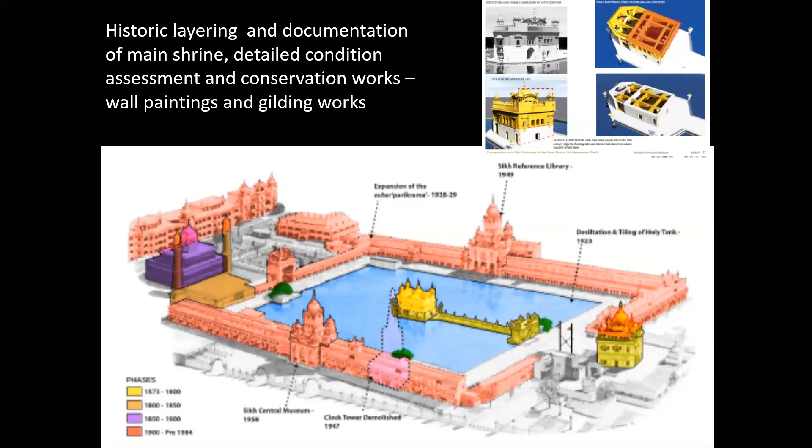So I'm just giving you an example of the Golden Temple work that we did in Amritsar. We were assigned the work of doing a detailed project report on the main shrine. It was really a blessing to get this work. And we did a complete documentation of the entire main shrine. We had to do the conservation of the gold work inside as well as the paintings.

I asked one of our international interns, Luke Bruno, who was coming from Paris to work in Jaipur, if he could go to this museum before he took his flight to Delhi and get the high resolution image. And we requested the museum to give us the high resolution image for taking up conservation work. So we could get a very high resolution image, which we printed at a large scale, so that we could know the actual historic patterns and paintings.

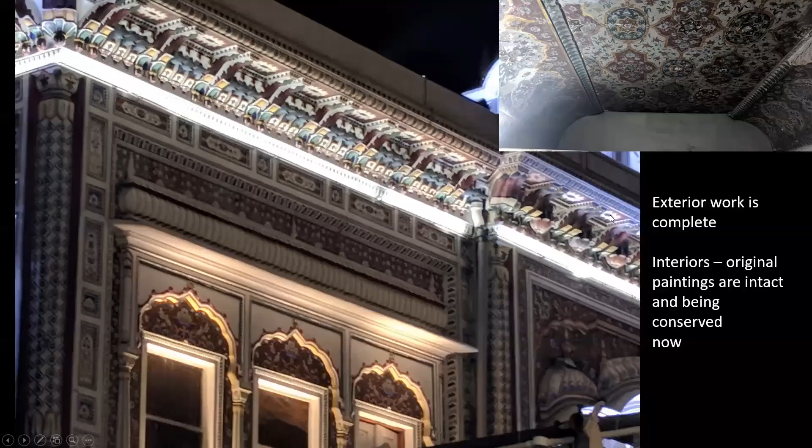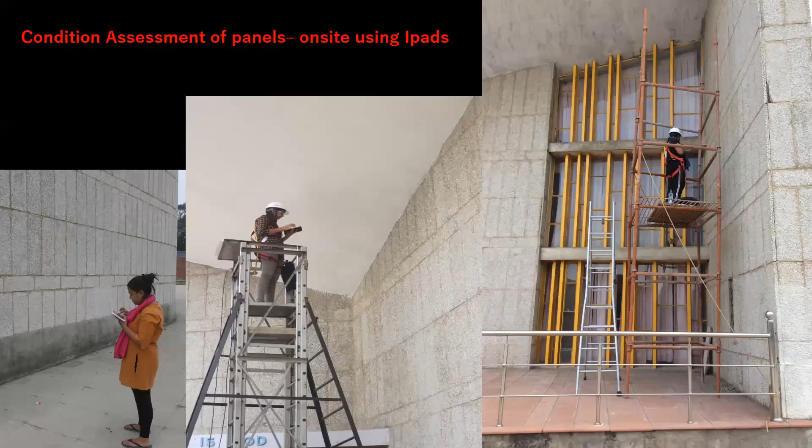The Gandhi Bhavan in Chandigarh is another example, though it's a modern heritage building. Pierre Jeanneret was inspired by Gandhi's philosophy here. And here we could use point cloud, digital, as well as infrared to analyze all materials inside the building. While preparing the conservation management plan, funded by the Getty Foundation, we had 4 workshops where we engaged architectural students from CCA and other colleges in Chandigarh for exhibitions and workshops in documentation and condition assessment. We also had a visually impaired intern who devised the universal access route, and we could put braille signages on the building.

So she's the one who researched, and she finally wrote a book also as an 11th, 12th school student. And her book on Meera is published by INTACH. Students today have a lot of potential, and one should really give them the space to develop and to learn more about these aspects.

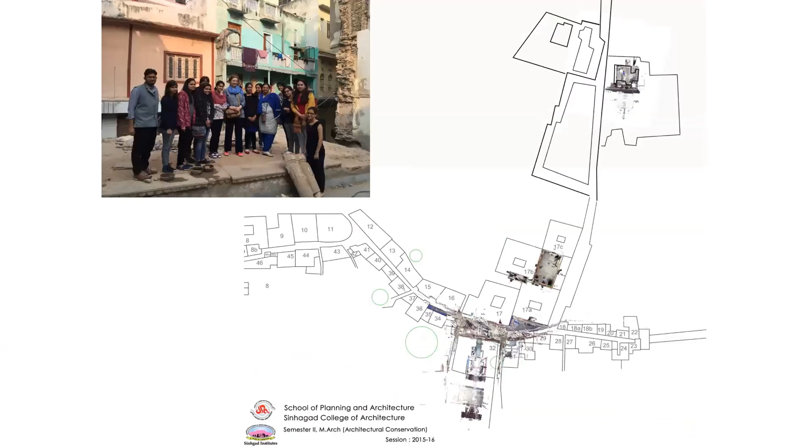This is part of our research grant, which we did with Sinhgad University and School of Planning and Architecture, Bhopal, in documenting Ajmer. And again, we use LiDAR scanning. Dr. Vishakha is there with Oriel Prizeman from Cardiff University, who were our partners. You can see documenting havelis and other historic structures using LiDAR, and then creating a website from the research work where all the research activities of the students are placed.

So everything the students worked on is available for all to use. We got calls from other architecture colleges that they need this information, so the link is already there and they can download and use it. Similarly, in Jaipur, which is a historic city, we've been working since 2006 to 2022 now. And we've got several World Heritage projects there, with sites inscribed, including Jantar Mantar, the Jaipur City, and Amer Fort.

But we started with this project on Ghat Ki Guni. This was my bachelor's thesis project, and it became a live project. You can see the use of traditional materials in conserving historic gardens, and then after conservation, finally the heritage walk that was launched. So this is the outreach and dissemination I'm talking about, that the work doesn't end by finishing certain things or just studying and research, because it needs to be continued. That's why it needs to be passed on to the younger generation in the community.

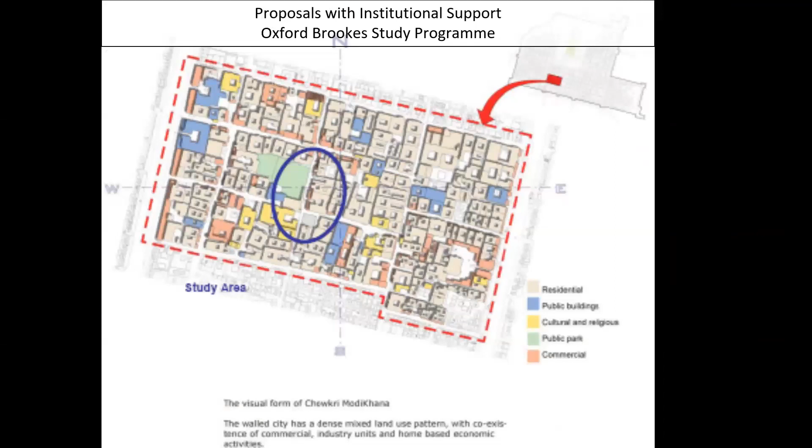This is an example of a participatory walk design, where again we engaged colleges. This is the Oxford Brookes study program, urban planning students who designed and created these spaces, and they worked with our team. And then we had these proposals discussed with the community in a community park. We displayed what is being proposed so that they could participate in it.